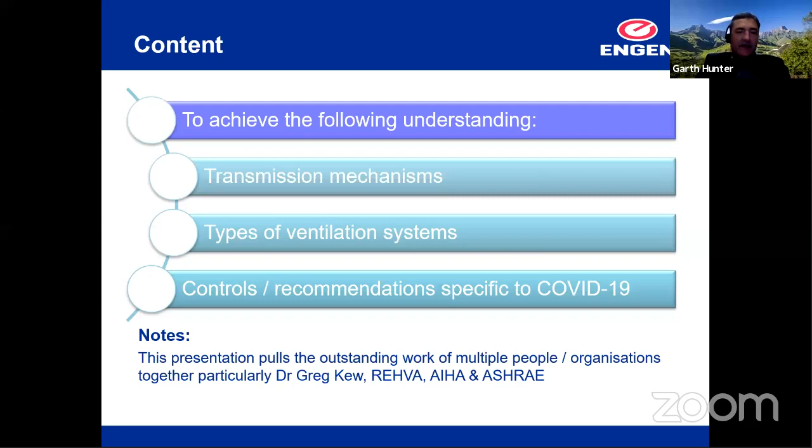And we've also taken liberally from multiple different organizations, primarily REHVA, which is the Europeans, and ASHRAE, the Americans, their documents. And there's some brilliant documents out there. And also recently, Greg and I listened to a 2-day webinar series, and we've liberally taken out of those as well. So really view this as an aggregation of what we currently understand science to say on the subject. This is certainly not my own work. It's really an aggregation.

Then, to go into the detail, the SARS-CoV-2 virus, which causes COVID-19, is 0.1 micrometers in size. It dies at 56 degrees centigrade. That's important, and certainly not like the early WhatsApp days when they said, when summer comes, you don't have to worry. It's also viable up to 9 days, and that's based on 22 studies. The early studies showed that at 72 hours it was viable on plastic and steel, and that still stands. But on the Princess, that cruise ship, they found viable titers of up to 14 days. But the 22 studies showed on average 9 days, and so that's what we take the viability to be.

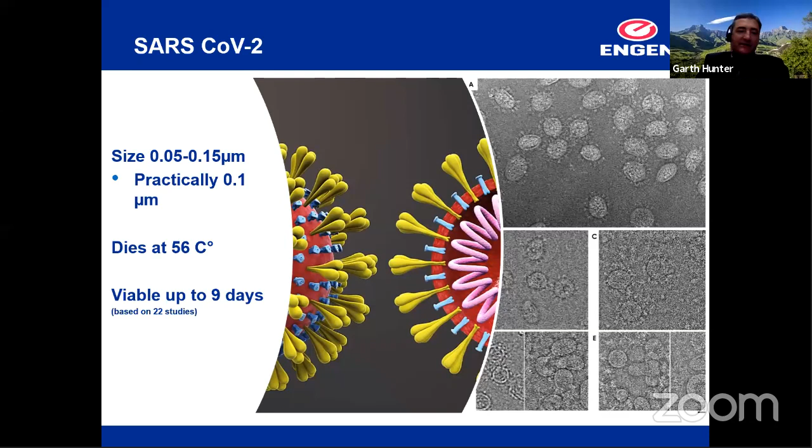The reason why I'm covering this detail in transmission is that it has really practical implications for ventilation. We can't really understand how to control if we don't understand what we're controlling. The size of the droplet or the aerosol is critical. We often speak of the size of 0.1, and we wear masks and use filters, and we compare the size of the filter or the mask to the virus. But that's not correct, because this virus, as all viruses, never travels alone. The airborne virus is not naked; it travels with water, protein, and salt. And this makes the droplets substantially bigger.

And you see the last point here, the physics is the same for all viruses. So it really doesn't matter how big the virus is. It's really the size of the droplet or particle the virus is in that we're controlling. You could have very high concentrations, many viruses in a single droplet. Importantly for ventilation, the size of the carrier droplet aerosol defines transport. It says how long it stays aloft, based on a much larger particle than 0.1 micron. It says how far it can travel, how quickly it falls onto surfaces, where it deposits in the respiratory system, which I'll speak about later, and how efficiently it's removed by masks and filters.

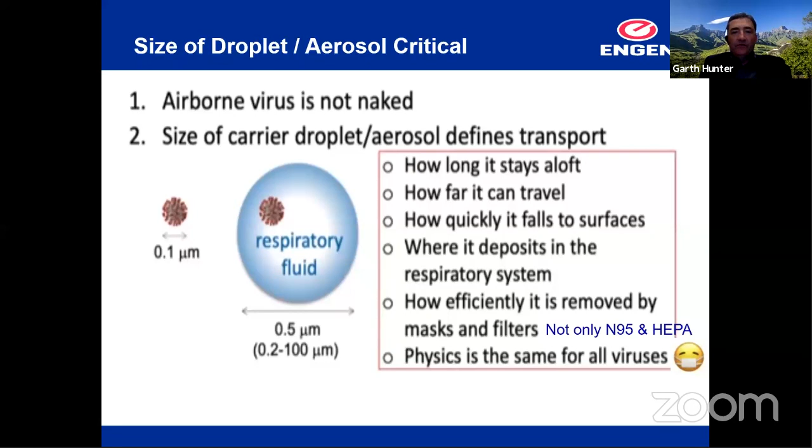And this is another key learning. Everything we share today is based on our current understanding. I'm not saying that anything is cast in stone. A lot of the things here, we've looked at research, and this is the best guess on what research says at the moment. If better research comes along, it'll replace what I've said. So we're not saying anything emphatically, but we are saying that we have a far better understanding of the disease and controlling it than we had in the early days.

And one of these has been the understanding that droplets or aerosol inside the body and outside the body are different sizes. The reason this is important for ventilation is if we're trying to control a particle, the WHO, the World Health Organization, spoke about less than and larger than 5 microns. They said that if it's less than 5 micron, it's an aerosol. If it's greater than 5 micron, it's a droplet.

And inside the body, that works great, because if you inhale these droplets or aerosol, the particles larger than 5 micron are taken out of circulation by your upper respiratory tract. And the ones that are smaller than 5 microns can find their way down to your lower respiratory tract, including your alveoli. Now, if you're talking outside the body, that's where things become different, and the less than and greater than 5 micron doesn't work as a practical tool, because the physics-based cutoff for droplets and aerosol is in fact around 60 to 100 micron.

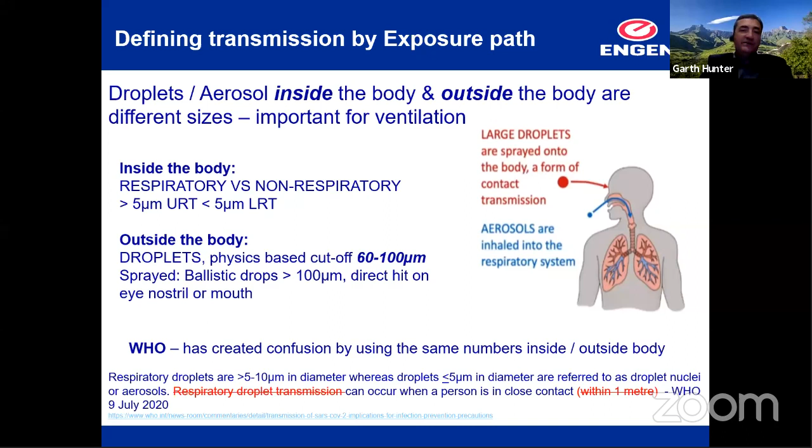And there's some important learnings here. The one is the permanent contact time within the same space over a long period of time played a crucial role. And this introduces two concepts. The one is concentration, how much of the virus there is in the air, and that's important because that contributes towards dose. The other part that contributes towards dose is duration. So our two key factors are concentration and how long people are exposed. Together, concentration times time equals dose.

And so when we talk about somebody who gets an infective dose, it means that they're exposed to high enough concentrations and for long enough. And that relates to risk. So here people all on a single floor became infected, and there was a high enough concentration because there's poor ventilation in the space, and they were all in the same space for long enough. That's why so

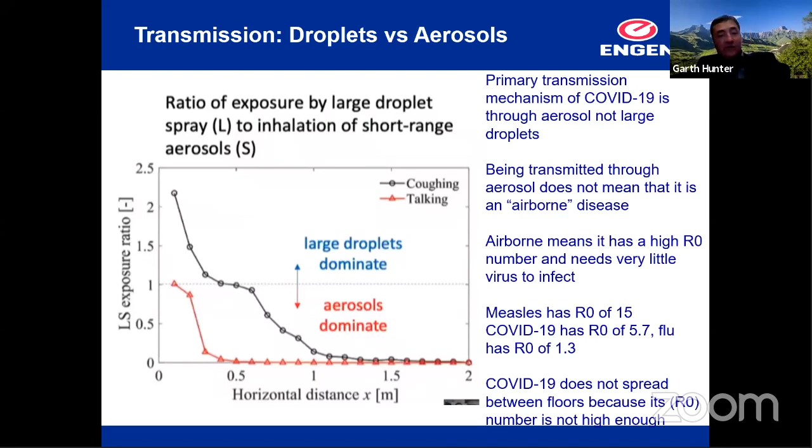So COVID-19 does not spread between floors because its R0 number is not high enough. If it had a very high R0 number, the likelihood is that it would spread between floors. But it doesn't mean that it's not transmitted through aerosol. So we saw that over here, it traveled as aerosol, the concentration of virus within that space built up because of poor ventilation and infected all these people. Now, aerosol means that it can travel far more than 1.5 meters. It can travel across the space over here. And that's how so many people became infected.

Then another important consideration is, we've probably seen this, where you get somebody sneezing or coughing. Coughing can go about 2 meters, and sneezing can go up to 8 meters. And what happens is that the large droplets, 60 to 100 micrometers, as well as the small aerosol, less than 60 to 100 microns, all travel in a cloud. It's not like you have this nice cutoff. So if somebody sneezes, everything travels in a moist cloud. And if this is indoors, a Japanese study found that the rate of COVID-19 transmission is 18 times higher in an indoor environment than an outdoor environment.

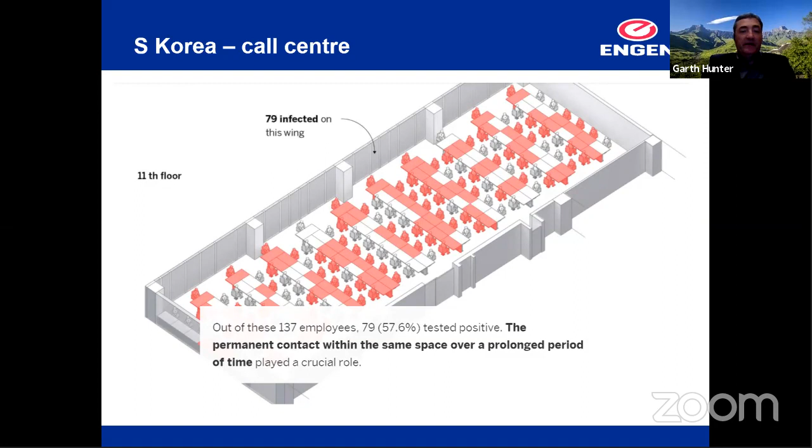So this really gives a backdrop for saying why ventilation is important. If you don't remove the air and change the air out, that virus is not going down. A lot of the water will evaporate off that large particle. It then becomes what we call a droplet nuclei. It'll remain in suspension when it gets small enough, because the water's evaporated off. It can remain in suspension for a long time, and that's the problem with an indoor environment, its stability is not good.

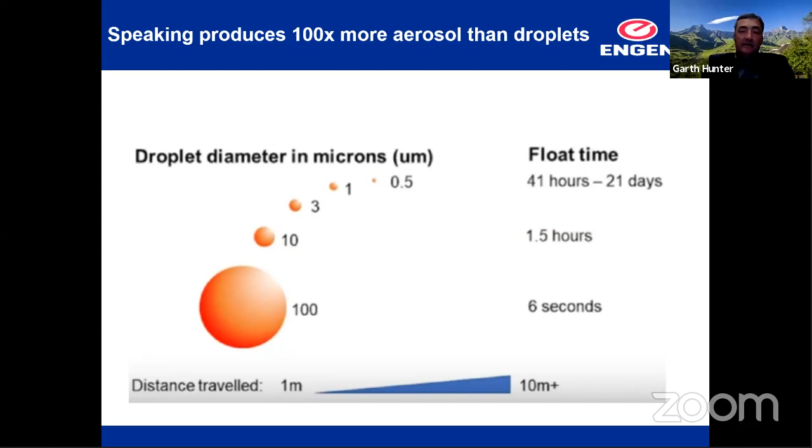So we've got a couple of things. Now we're switching on to the air conditioning part. When we talk of air conditioning, you see that we speak of heating and cooling. Air conditioning is not ventilation. Air conditioning only speaks of heating and cooling. It doesn't speak of introducing fresh air at all.

There's a Chinese restaurant example where you get a mid-wall split unit air conditioner. It sucks the air through a very rough filter, it's not even really a filter. And then you've got this airflow going, and that would create this circular current. Think of airflow patterns within a building similarly to weather patterns, because they follow very similar things. So what you have happening here is this weather pattern going across here, because you've got air conditioning, but no ventilation.

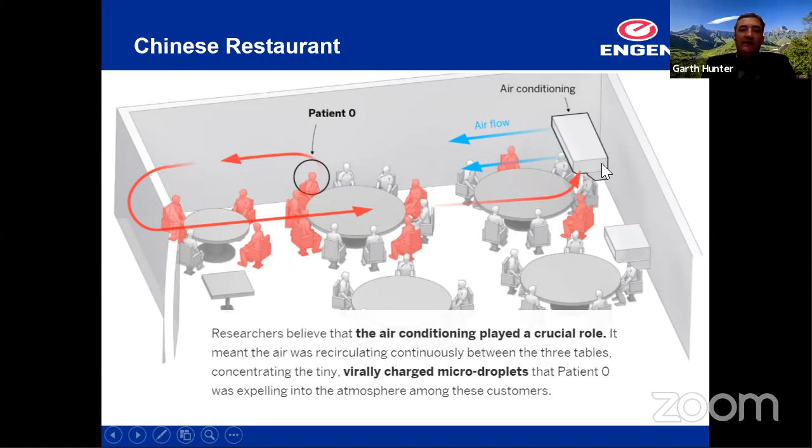You have an increase in concentration. This is patient 0 over here, the person who was infected. You got sufficient concentration of the virus built up in that room. You had this dominant weather pattern coming out over here, blowing here, going back here. And then you had sufficient duration. And that's why so many people became infected.

Similarly, there was a Buddhist gathering, and there were 2 buses. Within that bus, they had all the windows closed, and they had the air conditioning system on recirculate. So you had a buildup of concentration in that bus. You then had circulation of that aerosol. Remember, aerosol is the dominant transmission mechanism for COVID-19, and it circulates around the bus. It comes in here, gets heated up and blows out there, maybe it was cold, and it goes around and around the bus.

And you had the same thing: infective dose. How do you get infective dose? Sufficient concentration for long enough duration. These people were sitting in the bus. The infected person's breathing out, breathing out concentrated amounts of virus from the lower respiratory tract. You're talking, you're breathing out virus. That virus builds up within the space. So you get increased concentration, and they had long enough on this bus to become infected. 23 people got infected in the bus. On the other bus, despite people mixing at the Buddhist ceremony, nobody else got infected.

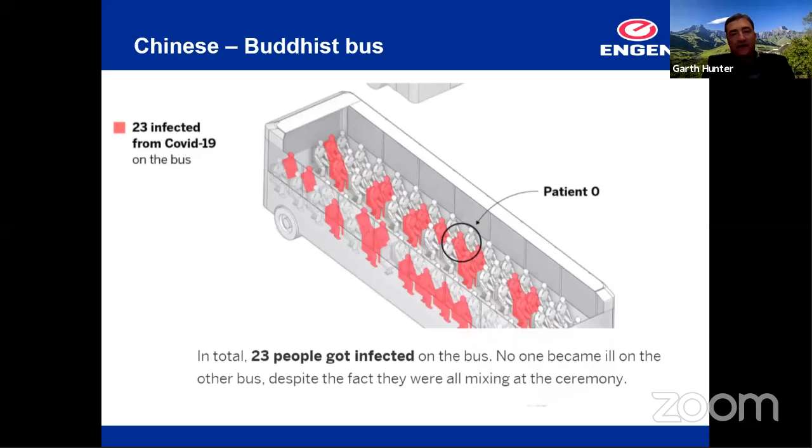So when I speak of ventilation, and all the definitions, no matter which definitions you look at, it speaks of the supply and removal of air to and from a treated space. When we speak of ventilation, we talk of taking fresh air from the outside, putting that air in, and removing the air.

So if we talk of air changes per hour for a building, for instance an office, you take all the air out of that office, you put fresh air in, you remove the old stale air, and you do that a number of times per hour. That's what air changes per hour speaks to. And there are standards for that.

When we speak of an HVAC system, HVAC stands for heating, ventilation, air conditioning. So by definition, if a system doesn't introduce fresh air from the outside, it's not an HVAC system. It could be an air conditioning system. And this is an important difference: we often speak of ventilation and air conditioning as if they're synonymous. They're not. An air conditioning system only heats and cools the air. It doesn't bring in fresh air. And this is critical.

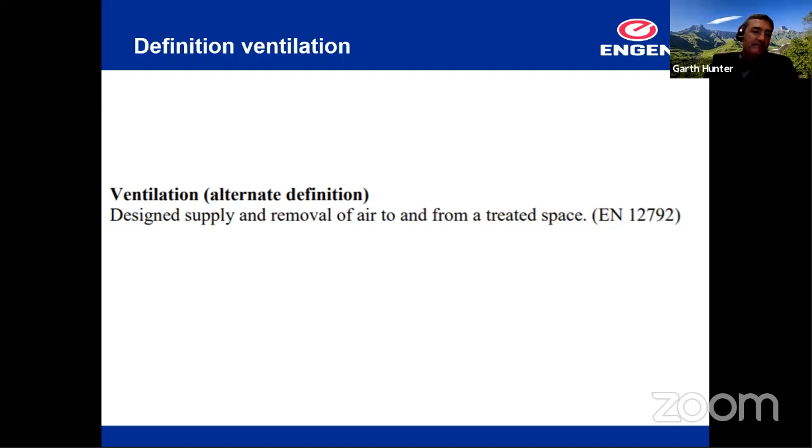The other point we make is that not all barriers are equal. In that restaurant scenario I'm speaking about, some people are religiously trying to wear their masks. But if you allow the concentration of virus to build up in that restaurant, and somebody infected is there, wearing your mask is a far less effective mechanism, even if you're wearing it correctly. I'm guessing only about 20% of people I've seen wear their mask correctly. And if you're not wearing your mask correctly, it has little, if any, benefit at all. So we shouldn't think in our workplaces that all barriers are equal.

They're not. And with social distancing, if you need to speak to somebody and move within that space, you can get large droplet transmission and medium-sized aerosol, then you move in and out of this space. Always think of the two principles to prevent an infectious dose: reduce concentration, and reduce duration.

In terms of risk reduction, when I say not all controls are equal, if you're wearing an N95 or FFP2 respirator correctly, you've got about 90% risk reduction, which is about the same as 4.5 air changes per hour. But this is reliant on people wearing it correctly. And that's the weakness of all PPE controls: you're relying on behaviors.

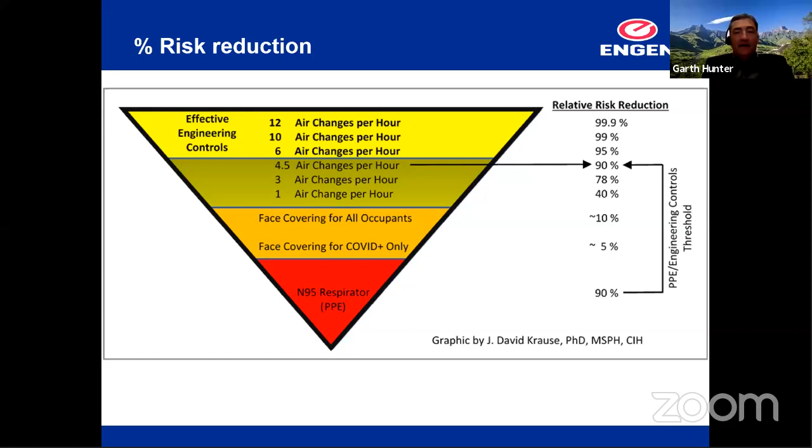Have a look: from 1 air change per hour, you get about a 40% reduction, bringing fresh air in, up to 12 air changes per hour, where you've got 99.9% relative risk reduction. So for example, in that bus, if we had had 12 air changes per hour, kept the windows open, taken the air off recirculation and brought in outside air, we would not have had the same number of infections that we did.

We can understand it like this, in terms of virus concentration and ventilation. Over here we've got a ventilation system where we're bringing in fresh air and exhausting the other air. And you can see the concentration, the number of red dots, is far lower. And that speaks to reducing risk.

So within office buildings, people want to know: if I keep 1.5 meter distancing and put up barriers, you still have aerosol, and that aerosol will travel throughout the building and you will not achieve sufficient risk reduction. You could have a barrier over here, these people could be wearing masks, but they'd still be incredibly at risk for COVID-19. Think of the Korean office building: the aerosol will distribute approximately evenly, and people throughout that floor would be at risk of getting COVID-19 infections.

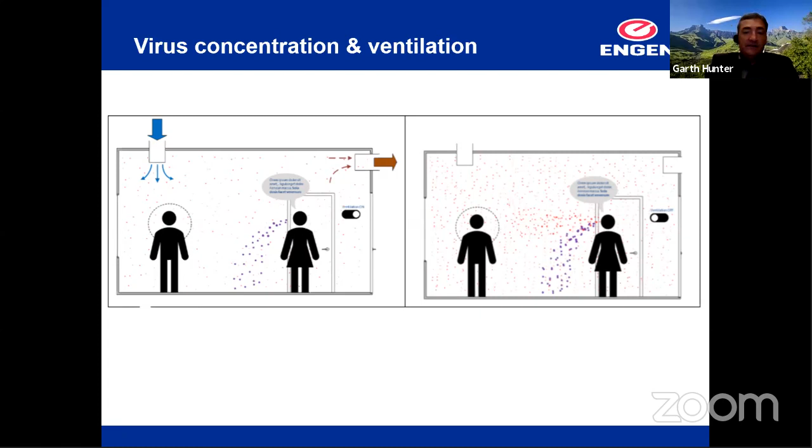And you can see over here that there's the large droplets, there's the intermediate size one, and there's aerosol. And we said that the primary transmission mechanism is through aerosol. And so if we don't have ventilation, such as in this case, we have a very, very high risk of transmission.

What does SANS say about it? We get SANS 10400, the guide to the National Building Regulations, and then SANS 10400 Part O, 2011. You can either ventilate buildings through natural ventilation or artificial ventilation. I'm going to cover the artificial ventilation in detail here. You'll see that for classrooms, we required about 2 air changes per hour. That means the volume of air within the classroom had to be changed out twice in an hour.

And what did that prevent? We've always said, oh, don't worry about flu. Don't be a sissy, don't worry about flu at all. Despite the fact that flu killed thousands of people across nearly every country per year, we said no, that's not so important. And what 2 air changes per hour does is it allows comfort and prevents body odor. It doesn't smell stuffy. So if you go into a building, such as that restaurant I went into, and it smells stuffy, you're not even achieving the 2 air changes per hour.

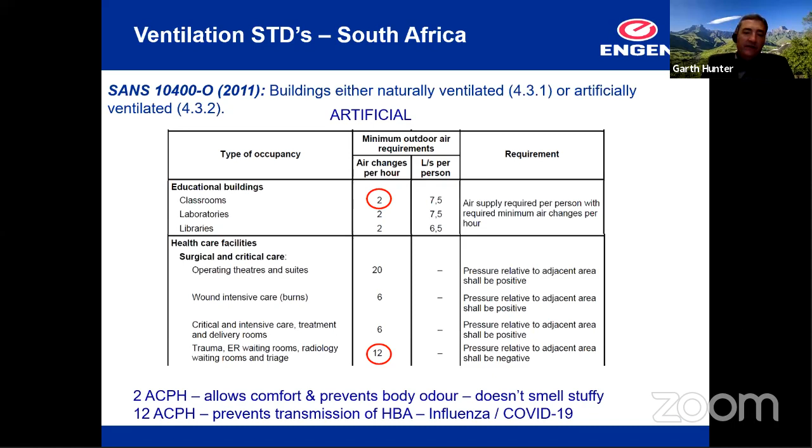If we look at what SANS said for trauma ER waiting rooms, radiology waiting rooms, and triage, what did they say you needed? They said you needed 12 air changes per hour. In this time of COVID, that's really what we need. And all the science and the numbers agree with that number approximately. Air changes per hour is more of a rule of thumb, where if you have a larger building, a larger volume, the number of air changes per hour varies. And you need to work off the liters per second per person.

ASHRAE is an American organization, and we've always worked off 700 ppm, keeping CO2 concentrations less than 700 parts per million above ambient. People breathe out CO2, and all of us do so at a fairly constant rate. And CO2 is an excellent marker of indoor air quality. The ASHRAE guidance is keeping CO2 less than 700 above ambient, the outside air. If the ambient air was at 400 ppm, you add 700 to get 1100, and you must keep it below that.

You get quite a variation in ambient CO2. I've seen readings from around 380 ppm to around 520, which is high. And that's why we baseline against it, because we're interested in the CO2 being breathed out by people. So to be more accurate, we work off the ppm above ambient. We take ambient, add 700 to it, and must keep CO2 concentrations below that. But research shows that keeping to that old standard, which we've worked off for years, doesn't prevent measles, doesn't prevent influenza, which has quite a low R0 value, or rhinovirus in an office or school.

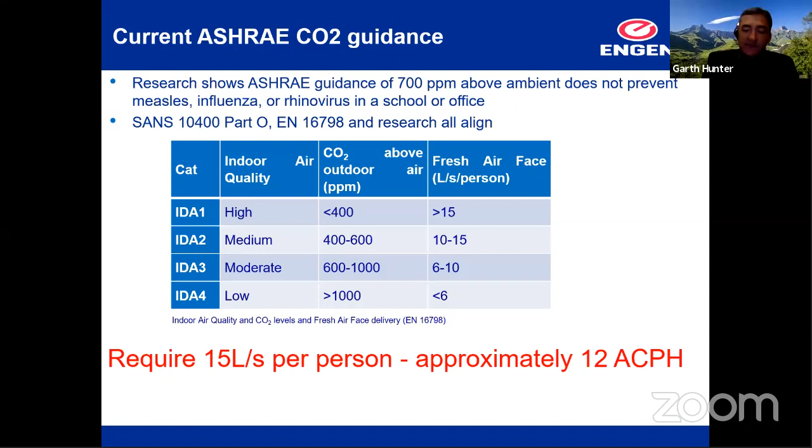For lay people unfamiliar with this, because I know I took a while to understand this: ppm above ambient. What it equates to is that if CO2 is running at about 400 ppm, and then we take that 400 value over here and add those together, we get 800 ppm.

If we're going to measure CO2, we need to actually have a practical value to benchmark against. Unless it's a very complex CO2 meter, where you have one indoors and outdoors, it becomes too complex. So what am I saying? That if we have a continuous CO2 data logger, and we put this on the wall and set it to alarm at a certain point, we should set it to alarm at 800 ppm.

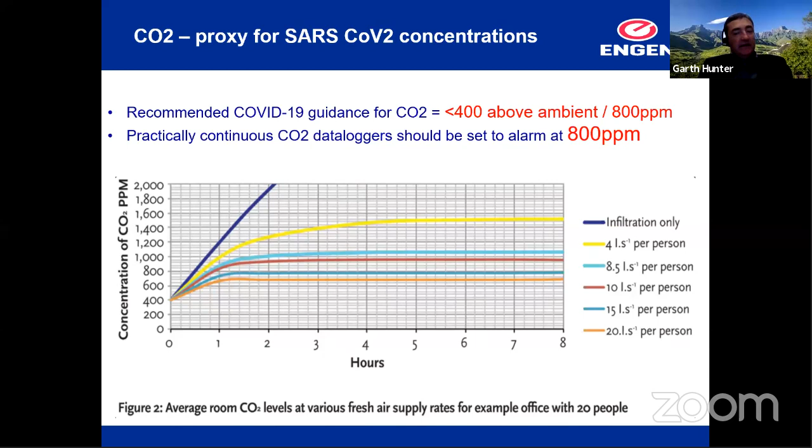So we're saying that if we keep the concentrations of CO2 to less than 800 ppm, we're introducing a significant risk reduction. We've got approximately 12 air changes per hour, and we're delivering approximately 15 liters per second per person of fresh outdoor air.

The most effective natural ventilation, typically, is when you have cross ventilation. So local cross ventilation: you have windows open on this side of the building, windows open on that side of the building, and you have cross ventilation. But depending on which direction the wind is blowing from and how fast, it might be very still conditions. So even if you open up all the windows, you're still not able to achieve good or sufficient ventilation.

It's also then that the basic minimum is that the windows in a building have to be at least 5% of the total floor area of the building. That's not going to be sufficient for COVID, because that was approximately set up to deliver 2 air changes per hour. So what am I saying about natural ventilation? I am saying that it's very difficult to actually control COVID through natural ventilation. That's where you can measure CO2, and without measurement of CO2, it's very difficult to establish what's happening in that building.

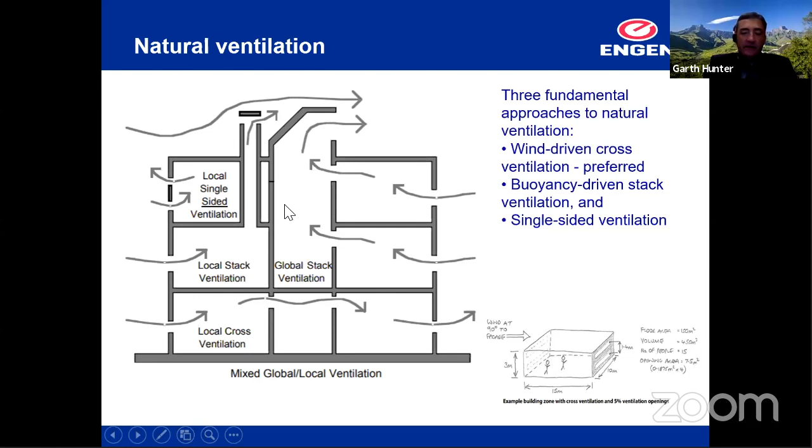Then we have probably the most common air conditioning system, not ventilation, an air conditioning heating and cooling system, which has no ventilation at all. And that's where we feel comfortable, because it's nice and cool. It feels like the air quality here is good. But after a while, we start getting tired within the building. And we all know it. That's because the CO2 concentration is building up.

I'm an occupational hygienist, and I've seen CO2 concentrations around 2,500 parts per million. Even in terms of decrements in thinking, it makes sense from a productivity point of view to keep your CO2 below at least 700 parts per million above ambient. There are just so many downsides to having this type of ventilation system.

What we're saying is your mid-wall split unit system doesn't have any fresh air capability. Your split unit system is not a ventilation system. It just recirculates and cools or heats the air. So the only ventilation you can have with this system is through opening windows or doors. I spoke to somebody today and they said, because it's a computer room, they've now welded the windows shut, so no ventilation is possible at all.

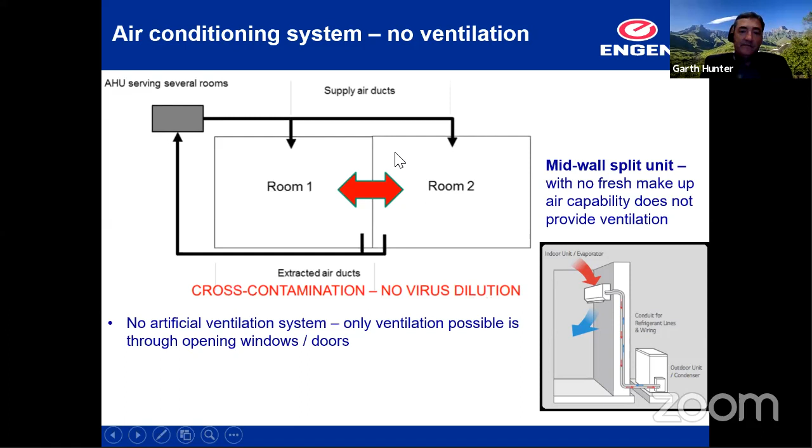Then we can also have, I've seen them at Engen, I work for Engen, we've got them but relatively few, a split unit air conditioning system with a mechanical ventilation system. So you have a cooling system, and then you have a ventilation system. You can either have an exhaust ventilation system, which means you suck the air out and fresh air comes in through air vents and other places, or a supply ventilation system, where you push air into the room and the stale air is pushed out.

This can be a very valid form of ventilation, because it means that you can supplement. You don't have to do away with your split unit air conditioning. You put in an additional separate ventilation system which either exhausts air out of a building or supplies air into the building. And these systems don't necessarily need to be that expensive.

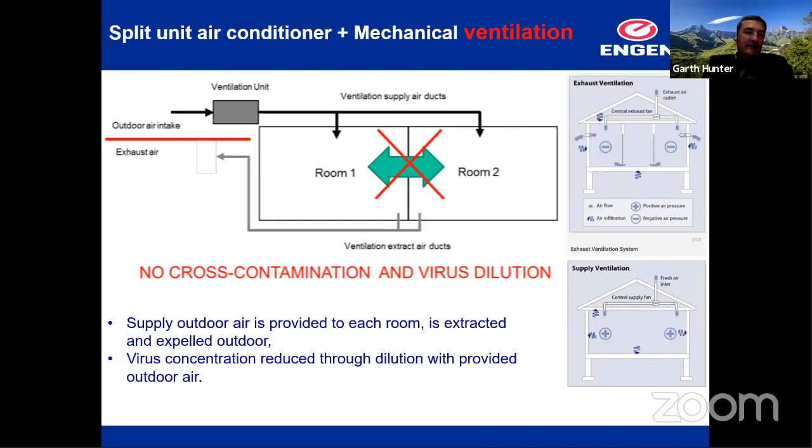At our terminal office in Cape Town, we looked at it, and for the whole building, which is quite a big building, it was going to cost around 80,000 to add a mechanical ventilation system to supply ventilation, because currently we only had a heating and cooling system.

That's because the aerosol was being sucked out of the room. They didn't allow the concentration of virus to build up in the room. That was at 36 liters per second per person. Depending on the risk of that particular building, certainly in healthcare settings, you need higher ventilation rates than 12 air changes per hour or 15 liters per second per person. Compare that with the Korean call center, where you had a huge room, but a build-up of virus concentration within that room.

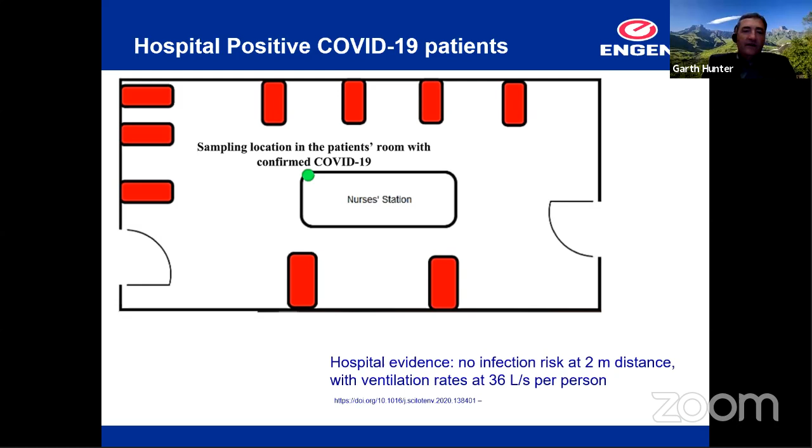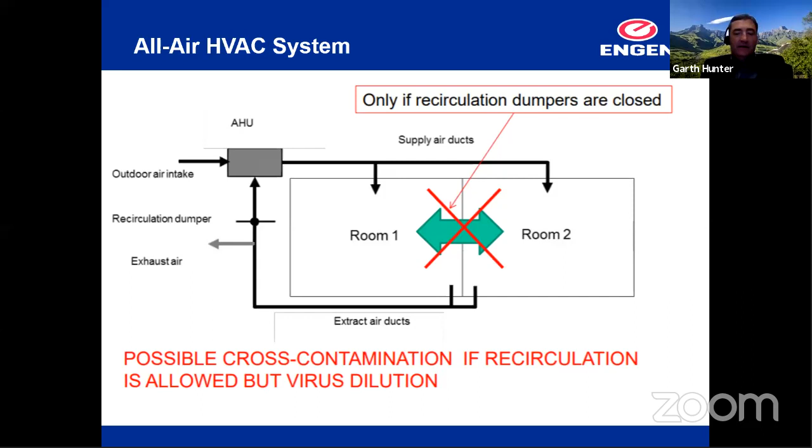Now we have assessment of buildings. What does this look like practically in translating this information into practice? I work for Engen, I'm the group hygienist, and this was done at one of our big plants, a central training facility with an HVAC system. We assessed each building separately. Often people ask how long can I occupy this building and how many people can be there, and they want a one size fits all. I'll say this emphatically: there isn't a one size fits all. You have to assess each building and its ventilation system independently.

We looked at whether we've got natural ventilation, windows, doors, cooling system, mechanical ventilation, whether dampers were open, whether it was compliant with SANS 10400 Part O, outdoor air, the floor area, and the number of people the building could accommodate for social distancing. An important concept is the limitations of use. To use that building through the COVID-19 pandemic, it can take 23 people, based on floor area and spacing. Plus we monitor CO2 with real-time monitors, keeping concentration less than 400 above ambient, less than 800 ppm, which is where we set them to alarm. And we have assessed all these buildings.

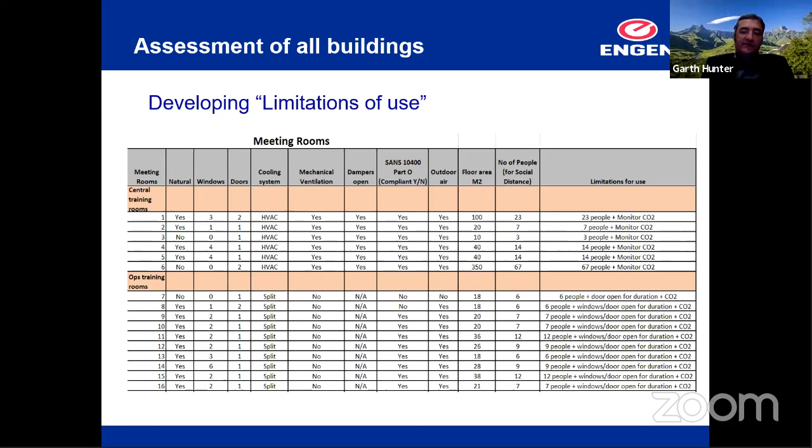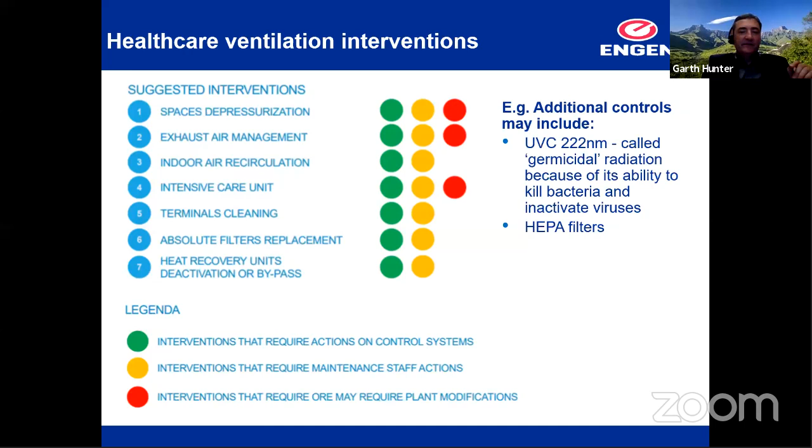You'll then see for healthcare facilities that you have more requirements, and that's where you talk about HEPA filters. Then, to cover another aspect of ventilation: what's the difference with a HEPA filter? A HEPA filter captures 99.97% of particles with the size of 0.3 microns.

Now, if we ask ourselves, do we need HEPA filters? Remember what we said about the transmission mechanism: the virus doesn't travel alone. It's the size of the larger particle, the larger aerosol or large droplet, that's actually important, and not the size of the virus, because even once it's dried up, it has salts, it has protein, and so it's still far larger than a plain virus. So is this size of 0.3 microns critical? Within the healthcare environment, absolutely.

But within a non-healthcare environment, there's also what we call MERV filters, minimum efficiency reporting value filters, and they have a scale of 1 to 20. MERV filters capture 95% of particles in the entire size range from 0.3 microns through to 10 microns. The suggestion is that if you need to filter in the non-healthcare setting, these may be more appropriate.

You need to consider this in terms of understanding what pollutants you have and what risk the building has. For instance, in a healthcare setting, even an occupational health clinic, I'd suggest that having HEPA filters, if you need filters there, is more reasonably practicable than in a far lower risk setting. You've also got to ask yourself, if we're exhausting all the old air with the dampers fully open on an HVAC system, why are you filtering the air? You're not actually taking any air through the filter.

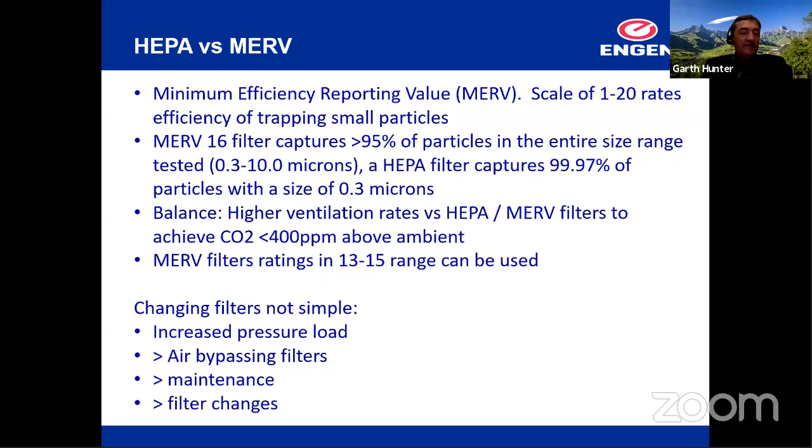Of course, changing filters is not simple. You get increased pressure load on the system, and the system may not be designed for that. You can also get air bypassing the filters. You'd have increased maintenance and increased filter changes. So changing the filters should not be done without understanding the implications.

The conclusion is that understanding the role of ventilation in reducing influenza infections is not new. A 2011 study found that in the US, increasing the ventilation rate from about 8 liters per second per person to 15 liters per second per person would save the US economy about $37.5 billion per year through reduced absenteeism and improved employee performance, including processing capability. When we get high CO2 concentrations, our performance goes down. Compared to the relatively small increased energy costs, we get massive savings.

I think it's perhaps taken COVID-19 to show us this. But the question is, are we going to learn our lesson, or just revert to what we knew before COVID? So I'm suggesting this is not just a talk about COVID-19 after which you can go back to what you did beforehand. The world pre and post COVID-19 is fundamentally different, including a permanent priority change in the role of HVAC. We're not only concerned with controlling body odor. We're living in the 21st century, 2020, and all we're concerned about is controlling body odor.

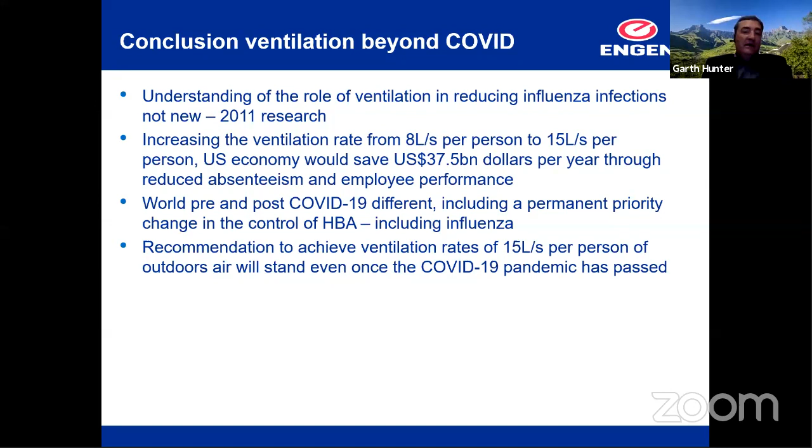We're not concerned about the deaths and actually the morbidity attached to influenza. Well, if we're concerned about running good businesses, I suggest that we should be. And so what I'm suggesting is a permanent change. The recommendation then is to achieve ventilation rates of 15 liters per second per person, and that'll stand even once the COVID-19 pandemic has passed.

The last slide is that you also need to consider where you are. So what do I mean by that? If you're in inner city Durban, Joburg, Cape Town, you also then have morbidity and mortality impacts through outdoor air pollution. If you get diesel, you introduce particles down to nanoparticles, PM 2.5, that's 2.5 micrometers, and those reach the lower respiratory tract. So the morbidity and mortality impacts of outdoor pollution are well understood.

And whether, pre-COVID, at the moment and post-COVID, you decide to either filter the air or exhaust the air, change over the air, will depend on where you are. And so no one size fits all. This is where you need to discuss and understand where you are, what your options are, whether you should be using MERV filters, and what level of MERV filters you should be using.